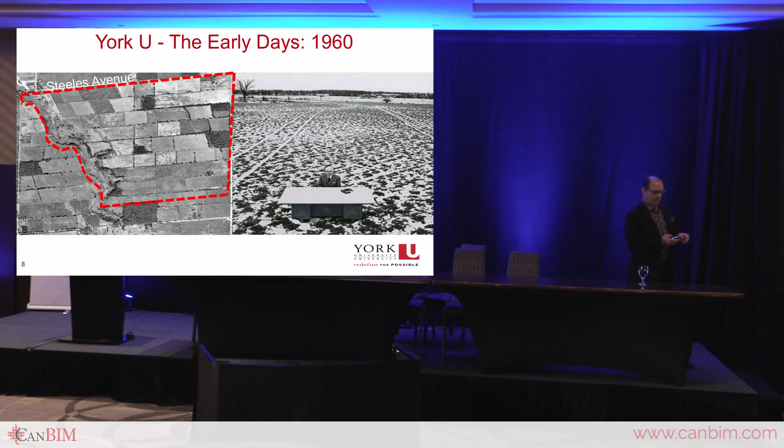It's bounded by basically an agricultural site, and here's the first president, Murray Ross, with a vision of a super university in the late 50s, early 60s. The university began in 1967, when they contracted a consortium of architects that established design excellence with mid-century modern architecture that some of us as architects love, and others very much hate, especially those who have to maintain and operate these buildings.

As I fast forward, we incorporated art into a lot of our public realm of the university. This is how the university started in 1959, when the University of Toronto basically gave us the land for $1 in the middle part of campus. So this is the older part of campus.

This is our current campus, now urbanized after over 50 years, coming on to 60 plus or minus years. To our luck, we now have a subway station right in the middle of campus, designed by Norman Foster's office, and another one by Will Alsop. All of that's also changed the way the university is going to expand because we're now accessible to the entire GTA.

People come from afar and nearby by public transit. I'd say about 80 to 90% of people are now taking public transit. We used to have 2,000 buses a day, both regional and local, on campus every single day. That's changed, and I'm really excited about it, because it's going to allow us to create architecture like this. This is fast forwarding to the year 2000.

Here we are, some wonderful buildings with some of the well-known architects in Canada and engineers working on our faculty. I'll fast forward a little more. This is a project we did in 2010 that won an award for library renewal.

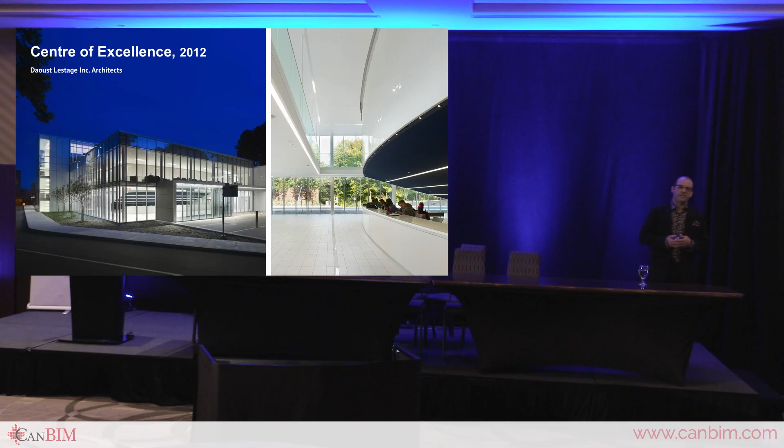As we advanced, we worked with Daoust Lestage from Montreal on a project at our Glendon campus, our French language campus. Cannon Design with Arup and an international consortium built this facility in collaborative BIM through Infrastructure Ontario, which was our first foray into working with Infrastructure Ontario. If you were in Ontario, you'd understand my sensibility about working with Infrastructure Ontario, and I openly say this.

Did we get a good product? Maybe in some ways we did. And the Bergeron—you saw the video—the Bergeron Center for Engineering Excellence: this building, the cloud, as we call it, would not have occurred, would not have been imagined, would not have been implemented if it wasn't for the active implementation of every aspect from conception to the end of construction to operations and maintenance in a BIM environment.

It wouldn't have happened. So a couple of projects we're working on, I'll come back to these as I talk about BIM a little later. An interesting building we're about to embark on—I'll share a little more about that.

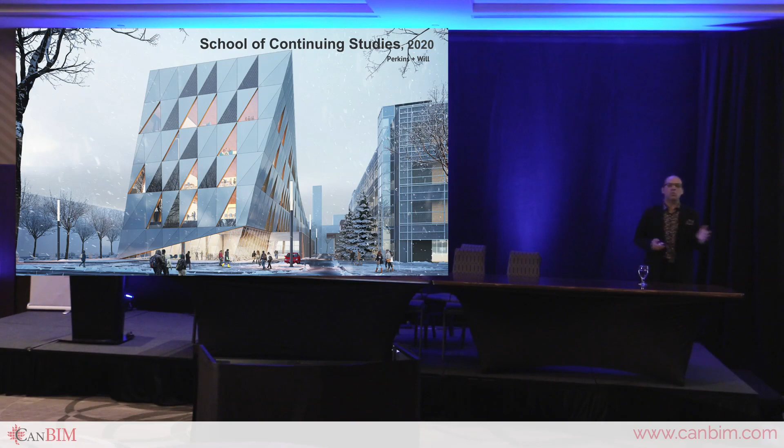What were the changing drivers that made York University consider this, outside of the fact that I had already been introduced to BIM back in 2006, working with a large international A&E firm where, at that time, more than 50% of the projects they did all over the United States and around the world were already done in some kind of collaborative BIM, including architecture, mechanical, electrical, and structural. We took that and put it to another whole dimension when we added landscape architecture, civil, etc.

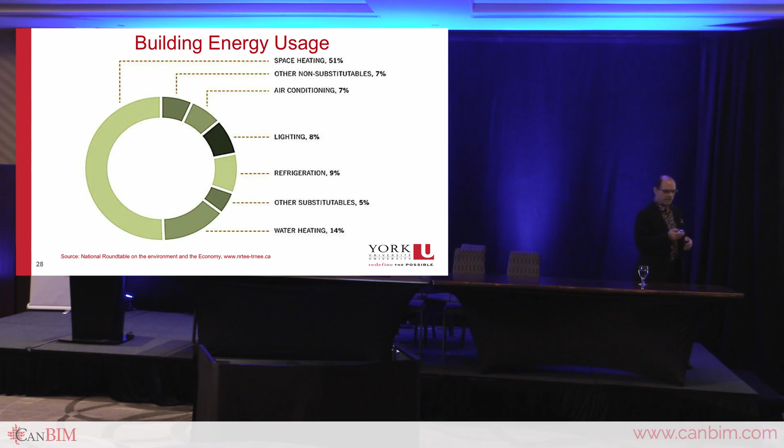So as we think about it as owners and operators, and where all our money goes on a day-to-day, month-to-month, year-by-year basis, it's in this area here. If we can make our buildings much more efficient and reduce the cost of maintaining and operating, that's usually about 50+% to operate a building in just space heating.

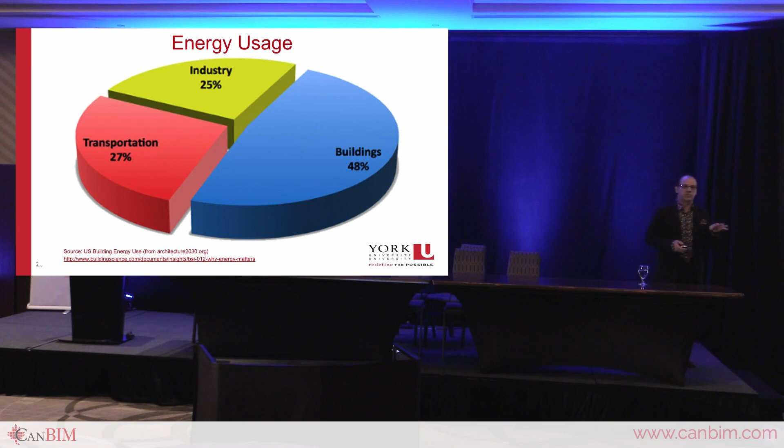If we can make our buildings smarter through planning, design, and construction, it means we can reduce that arc in the circle. Buildings occupy almost 50% of all energy usage in North America. These are statistics from the United States, but it doesn't differ in the Canadian context. So we have to consider how much smarter we can make our processes, integrated and collaborative, to reduce this amount.

This is crazy. Our stock of buildings at our university, in your cities, in your provinces, is extensive. We may be talking about new construction, but I think the power of BIM is really in existing structures, and I'll show you in a minute what I mean.

I'm always arguing with the folks who fund our projects. There's an initial investment of capital cost, and we forget the actual cost of operating that building. Over 50 years, a considerable amount of embodied energy goes to maintaining and operating these buildings. If we can keep the line fairly horizontal to the initial capital investment and bring these down, that's a win-win for everyone.

With the greenhouse gas initiatives that, at least in the province of Ontario, and also nationally, are starting to evolve and manifest into new policies for the whole province, it means we all have to think about how we plan and design these buildings and operate them for the life of their existence.

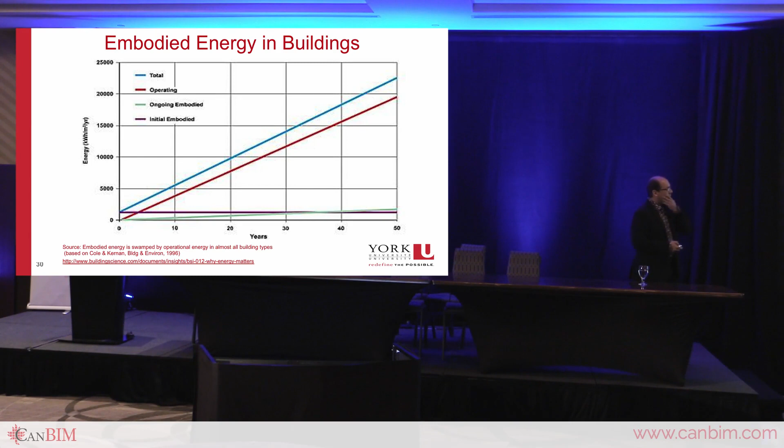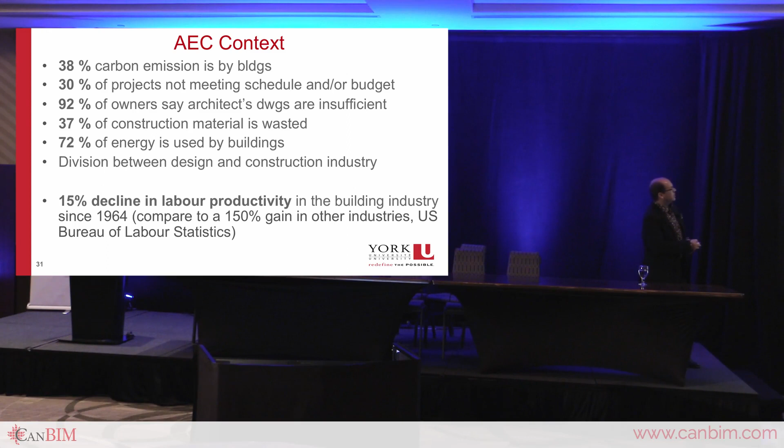Something interesting about this data, and for me as an architect it really pains me, is that 92% of owners say architects' drawings are insufficient. As an architect who received RFPs, responded to them, and then delivered a building only to be told that's my performance—and that's not just the architects, it's probably the engineers, the contractors, everyone put together, because there's a lot of waste. These statistics are important because they let us calibrate how we conceive and operate our buildings once constructed.

When you think about the decline of the AEC industry over the last 50 years or so, while every other industry improved by 150%, AEC has gone down by 15%. What does that say? Gravity is our nemesis—we have to build from the bottom up, can't build from the top down, gravity is always going to be there. So we always have to consider how we integrate and collaborate, and keep the project in mind rather than our independent responsibilities as architect and engineer. That's been part of the problem.

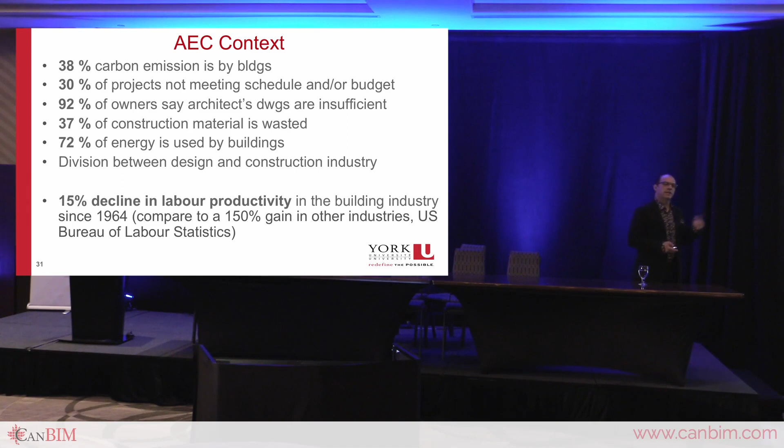If we think of ourselves as a team, I think BIM has created more team environments than ever before. Traditional processes get traditional results, right? And no disrespect to my engineer friends in the room, but this is what happens.

So let me take you to BIM at York—as I look at my watch, I think I have another 80 slides to go. This is our digital York, this is what we have to deal with. As York grows, its facilities and asset management become increasingly complex and important to deal with.

We're starting to utilize a variety of technologies, which we've been doing for a number of years now, as you can see from BIM, CAFM, and GIS, Maximo which is our work order system, and Archibus for space management. Maximo and Archibus work quite well together—they have a plugin for Revit which allows our BIM models to tie into our work order systems. We're working through that with our finance department and procurement to integrate them better.

We're working through the process of converting files coming out of the models through COBie to then integrate into our Maximo. We've been going through the exercise of trying to determine where the information should reside. We're also using GIS and ArcGIS to map all our information, and we're trying to merge both BIM and GIS as we move forward.

So let me take it a little further. This is a chronology of how we've adopted BIM at our university. In 2010, we started our first project for an existing complex.

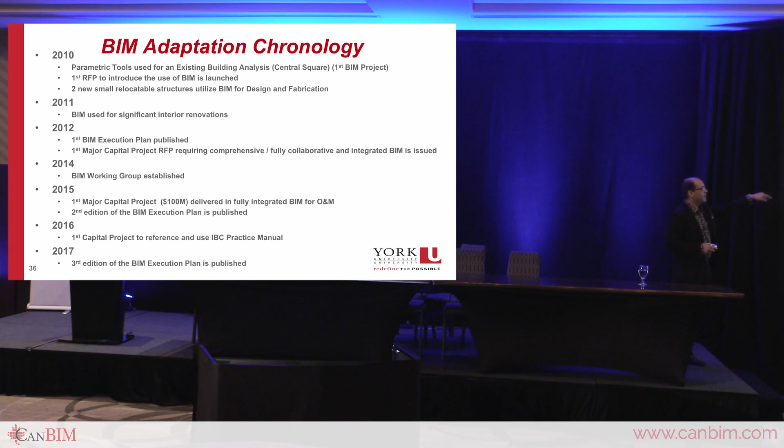And so as we move forward, our first capital project that was then rolled out using our first BIM execution plan was that video that you saw. And that was the general contractor partner and the landscape architect who worked in BIM for our particular building. I'll speak about that in a second as well.

We've now moved through these various phases. And right now we have about $450 million of capital work. We constantly have about $500 million. And I would say right now about 50% of that, because it's building related or interiors, it uses or implements some form of BIM throughout the process.

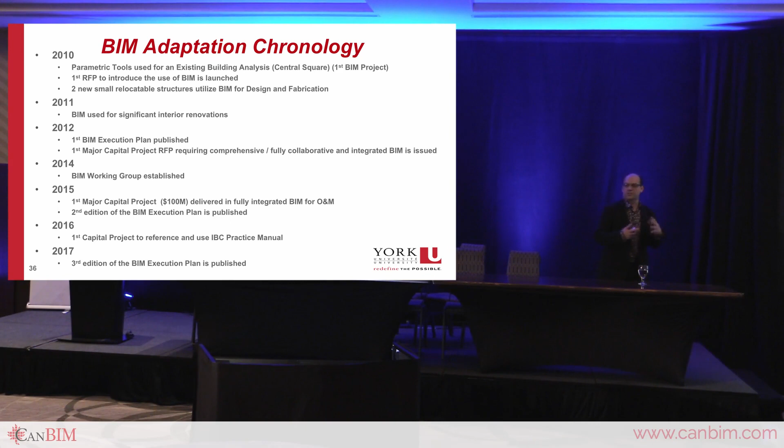And we're in actually our third version, maybe 3.0 of our BIM execution plan. And we have 2 BIM execution plans. One for CCDC2, stipulated sum, and one for CM, because they're a little different. And we're in the process of now conceiving a project which we hope to be integrated project delivery, which will have another set of BIM execution plan for that delivery methodology as well.

So our commitment to BIM is, as you can see by the awards, and I'm happy to say, we won the Design Award in 2016. We won the Owners Award, the Best in BIM that year. So we're pretty excited, and we're committed. And as you can see, the following year, we won it again as the Owners Award. So we're going to see if we can do a three-peat this coming year.

We have a couple of projects that are also fully integrated BIM. We're hoping that's the case. But I'm also excited if others win this award, because I don't think it's fair that we're the only ones achieving those milestones. I think the accomplishment would be when everyone else receives awards. And then it speaks to actually where we actually were and where we actually are going. So our trajectory then hopefully will be a different one.

This is when we won our award, and if some of you who are not familiar with IBC, the Institute for BIM Canada, the manual itself has our building on the cover and the tabs. And we're pretty proud that IBC felt that our project should be displayed in this fashion. And we contributed to some of the documentation that they used, just like we had learned from many others, like Penn State, and there's other universities in the United States. Princeton has another one. There's another one in California. We've learned from others, and we're happy to share and contribute as well. The more we can share, the more we'll learn from you, the more I think we're all going to go.

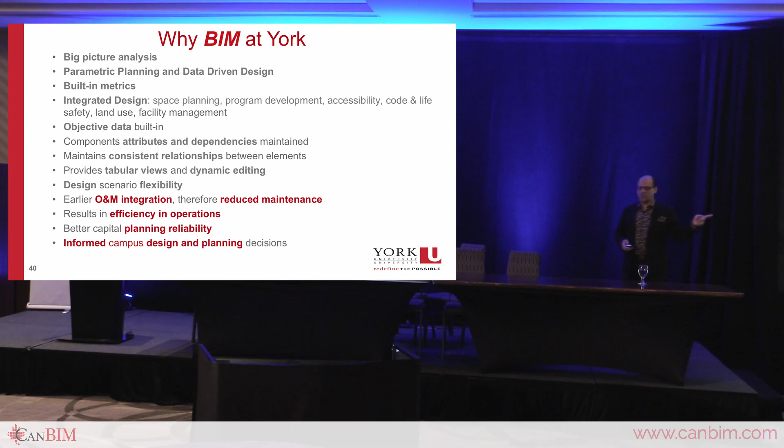So when I started to work in a BIM environment, we started to adjust where we spend our money. We were moving our fees from design development or construction documents to the front phase, moving the 10, 12% to 18% or even 20% for schematic design and design development. Thereby the objective is to reduce the amount of effort during your construction documentation phase. Doesn't that make sense? Where you can make the most impact?

You don't want to do it here because you know what that contract is going to say? Happy to make the change. Cha-ching, cha-ching, cha-ching, right? And that's not what we want.

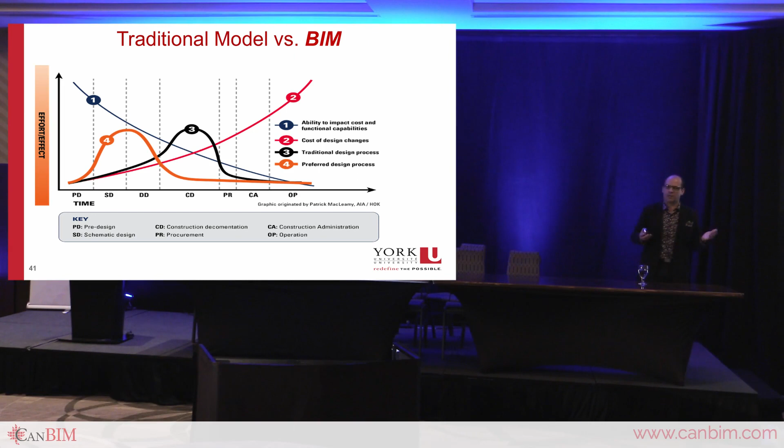So this is why when I see proposals now, I always have a conversation with the architects and engineers. Are you sure you understand we're doing it in a fully integrated collaborative BIM? You cannot be charging the fees in the manner that you're doing it, you're going to be short during this first phase. So they're happy to change it, and that's because it's coming from us.

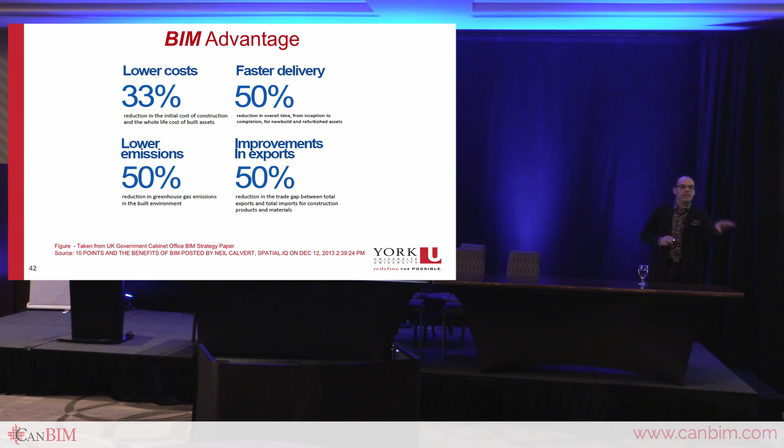What it's done for us as a university, and maybe it could work for other owners, is it's brought our operations and maintenance folks to the table a lot sooner. We involve them in the conversation. They don't shy away about BIM for operations and maintenance; they actually tell us this is what we need inputted into your models so they can extract the information for their particular responsibility. So getting them involved early becomes very important.

So I see I'm running out of time. 50 more slides to go.

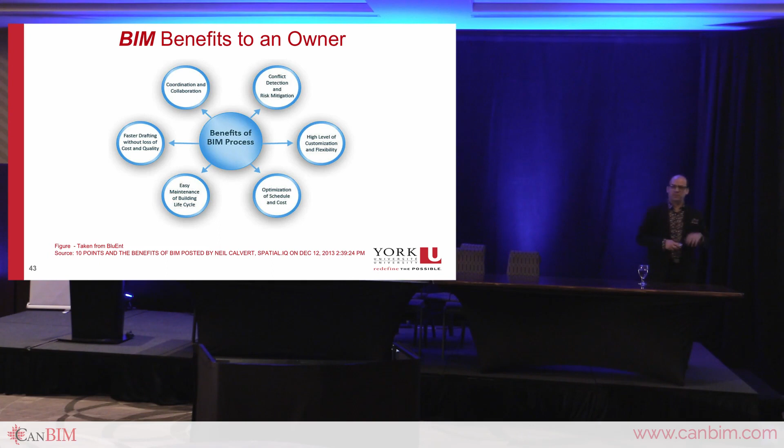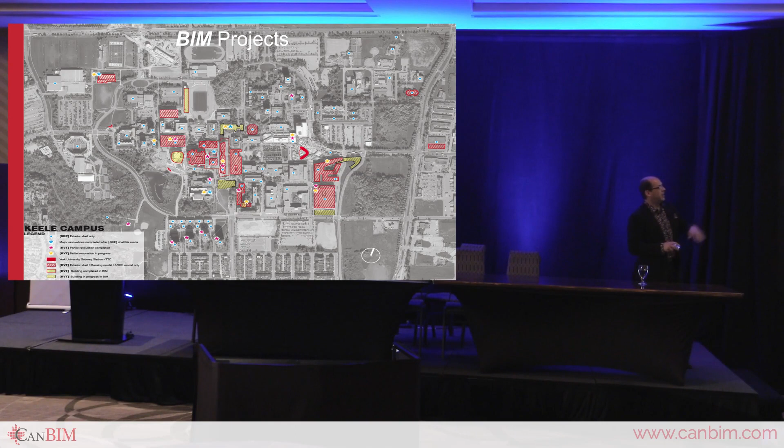So that's the Bergeron building, the cloud as we call it, our new building that we're building, that we're going to do there. All these other buildings are all in fully integrated BIM, and you see a scattering of all sorts of interior renovations all over the campus that will utilize BIM in some way. So let me take you to a quick study, which I already spoke about.

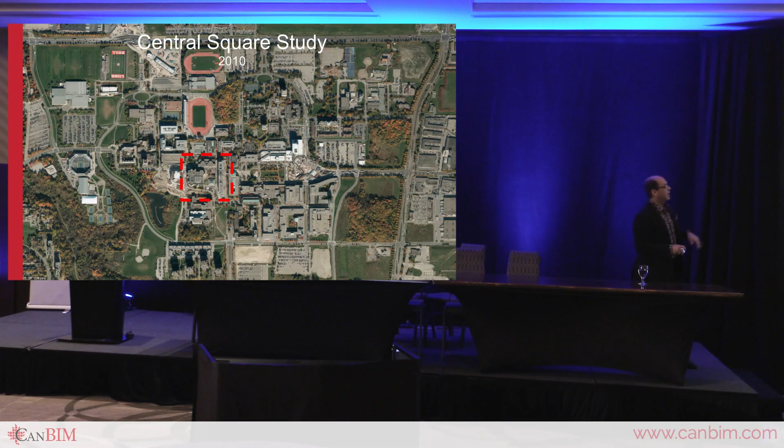This is the existing building, how we started, with five buildings. We basically asked the consultant team to look at all this, from space planning, building design, sustainability, stormwater management, code life safety, et cetera.

And so they were selected. It happened to be a team not from Canada, I have to admit, and it's unfortunate. And they produced a model of the structures for ourselves. We actually looked at a number of scenarios and explored those from different vantage points.

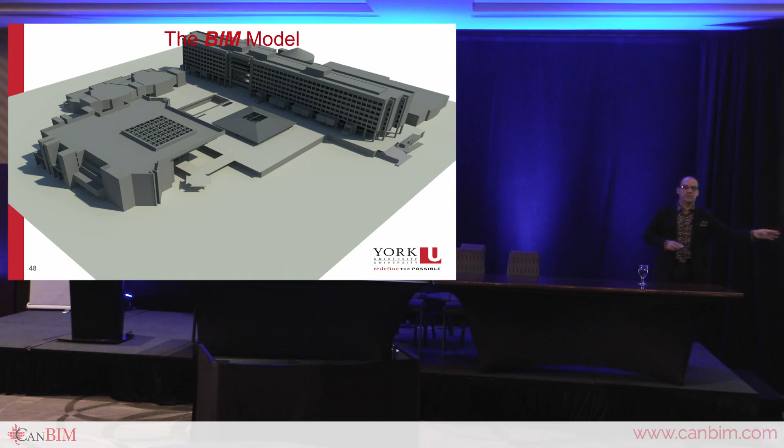For example, every option had an opportunity to look at energy and what that means in terms of return on investment. Using the model, we were able to do so many other analyses that we could inform the vice president of the university: look, we need $6 million for this, we need $5 million for that, we need $20 million for this, and so on.

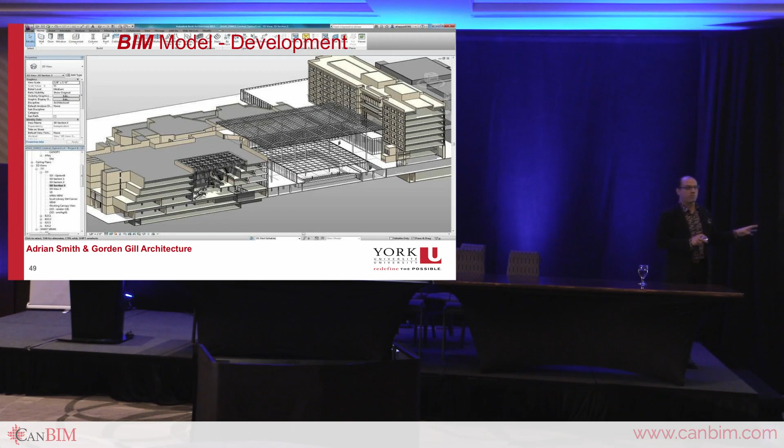When you provided these kind of metrics and the payback, they understood that if we wanted to improve the energy of those particular concrete buildings from the 1960s, we had to change the windows to improve energy performance, or maybe deal with solar shading because they faced west, and most of the glazing was on the west side—something that in the 1950s and 60s people weren't as aware of.

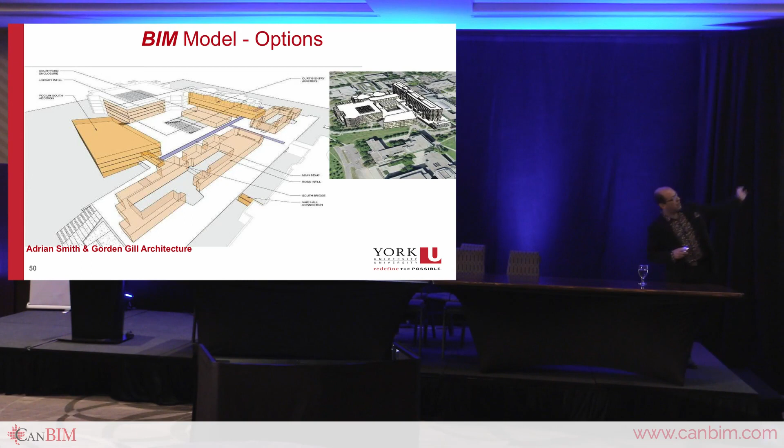So we looked at all sorts of measures for how we can improve our energy efficiency utilizing that base model. One team did all this. As a result, we ended up with all sorts of information that we were able to use to make decisions about our next phase.

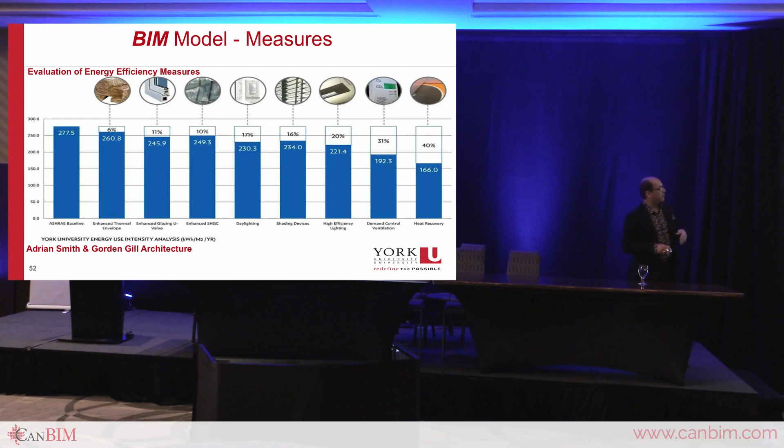And so our next phase was this. We took that study—it was a $300,000 study, by the way—and this was the first foray, first phase, of landscape architecture using BIM.

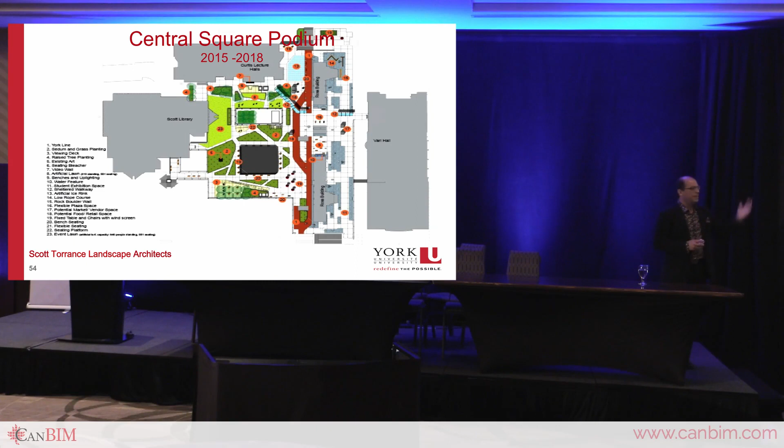We've basically renovated this entire, sort of desolate area, and now we've greened it. We're getting $100,000 back from the city of Toronto for basically greening that podium that was concrete for about 40 years, and as a result we're going to put that back into the project.

So can you use BIM for something small, something large? It's scaleless in my view, it's scaleless. So let me keep fast forwarding here.

The architect never once argued about it, nor did the mechanical and electrical engineers, and I think we ended up with a great project. Like I said earlier, I'm going to skip through that.

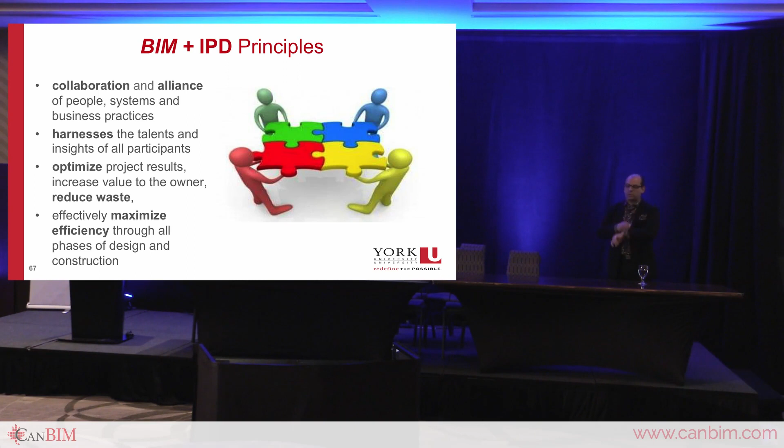So let me quickly walk you through some other images here. This is our project that won the award the other day, and let me show you how this was the catalyst for all our projects going forward.

So this is for 2012. We established the BIM execution plan. This was delivered, and now we have multiple projects following kind of the same format. However, we've gone back and learned from this particular project, and now we're tweaking our processes and deliverables accordingly—so the level of development versus the level of information. They don't always have to be at 500. One could be LOD 100 with LOI maybe 800, if such a thing exists.

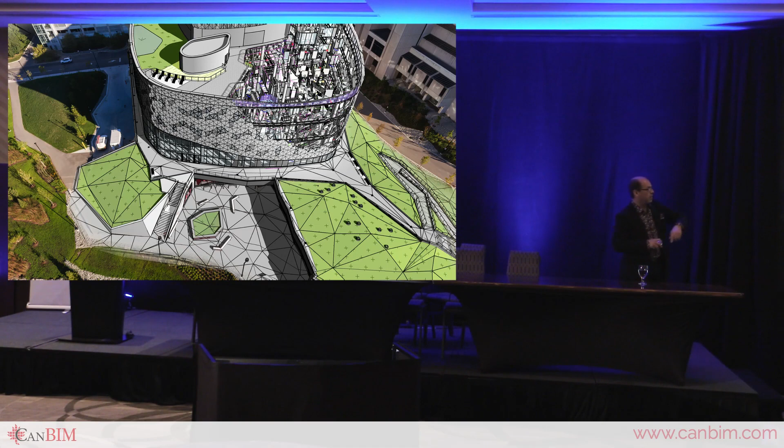So here's the landscape architectural work in a BIM environment—just wanted to illustrate that we did do that. Site logistics from the general contractor, very, very important. All the software that we're using, and it's shared—sorry about that.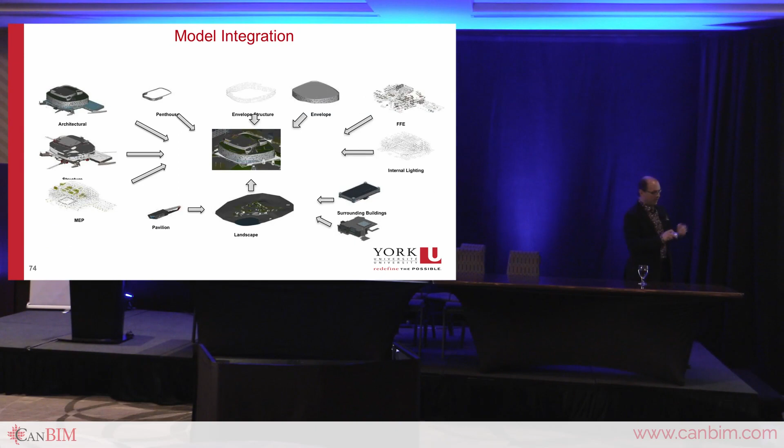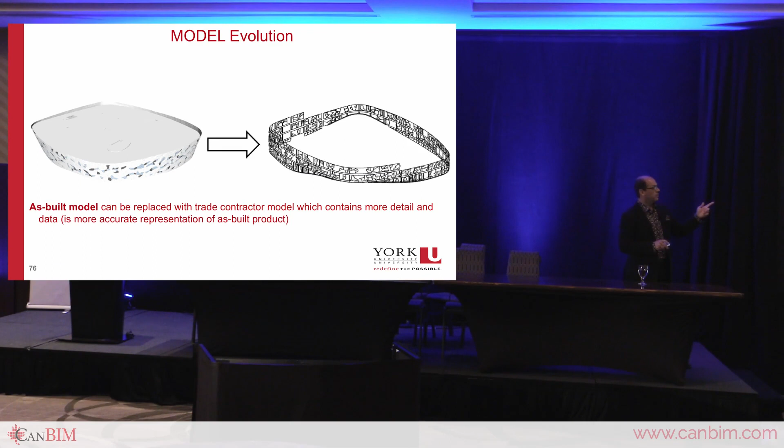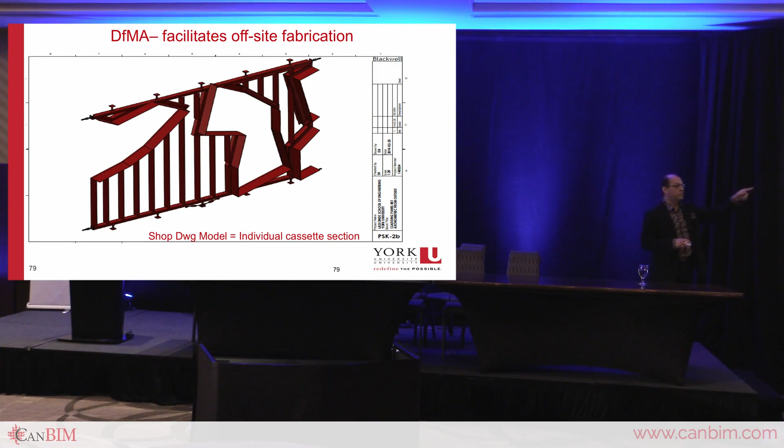Our models, in this particular case, had 85 models integrated—everything from clash detection and interferences were explored, and that's all the requirements we now expect on all our projects. For fabrication, from this it goes to this, to eventually the shop drawings in 3D, to fabrication, to the actual installation on the facades, and we're working on a new project exactly in this same vein. By the way, those cassettes, as we call them, had a 5mm tolerance all around, and those sections are probably about 7 or 8 meters long by about 4 meters tall.

That's very tight. Some of the infrastructure came from Calgary, by the way, to Toronto. I think that was a no-no, not that it came from Calgary, just the footprint - that's a long way to pay for energy.

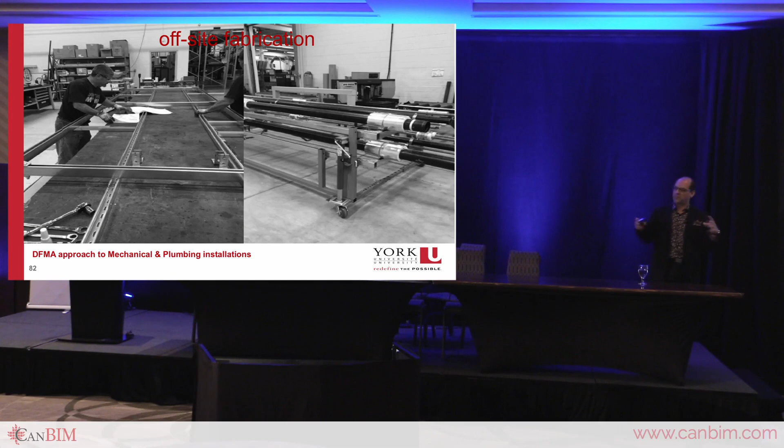All our plumbing and HVAC is done off-site and brought in and basically connected like a puzzle. That was the whole purpose of that, and we're doing more of that. On-site installation helps the guys put together all the glazing.

And then more importantly, this - we're actually identifying the assets. We already have a list of approximately 120 elements, vetted by a number of people that deal with our operations, energy, maintenance, and so on. Now we've calibrated that to those 120 elements, and that's being incorporated into our BIM execution plans, issued to the general contractor with the RFP in advance so they know what they're getting themselves into, not after the fact. So we have our coding, that university coding for our facilities and so on.

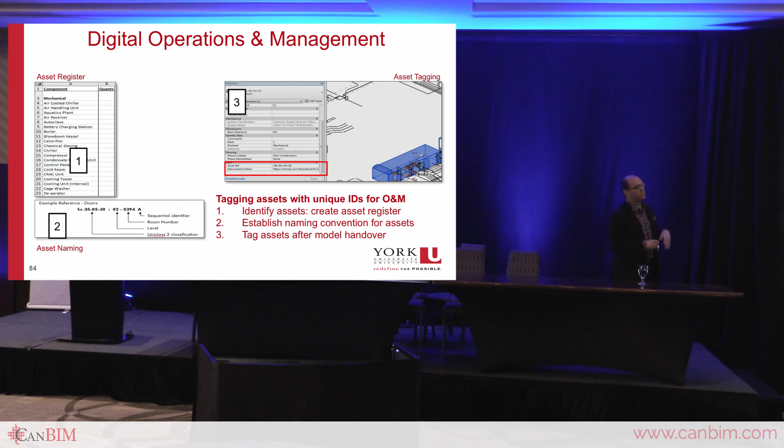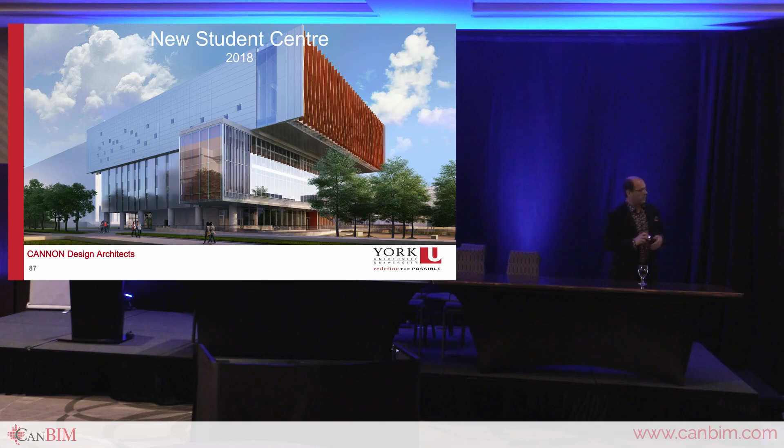Our new student center that just opened about 3 weeks ago was done entirely in collaborative BIM as well, for the purpose of operations and maintenance. The students are going to get a little crash course on how to take data out of a Navisworks model or maybe one of these other softwares that are easier, so they can manage and operate their building because they're the operators and maintainers of it.

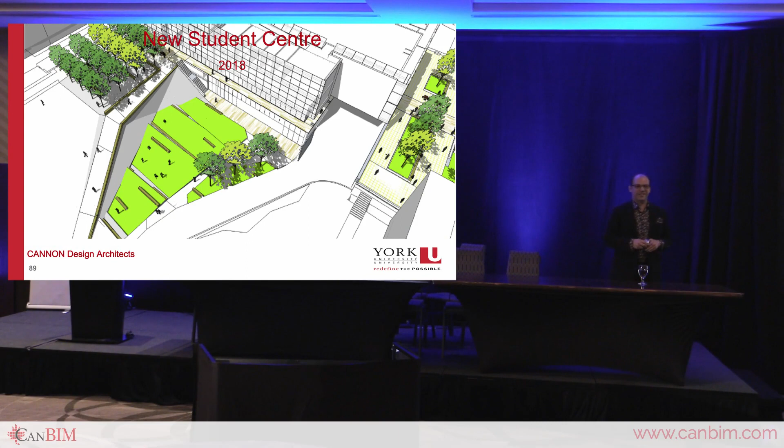So let me finish off with a few slides about the benefit of BIM for your business. I've probably already spoken about some of these: improved building design, there's no doubt; information streamlining and integrated workflows, very important; building performance and sustainability, and that's really our focus - that's always been our driver.

When we brought the operations and maintenance folks to the table to discuss this, this is what we spoke to them about, so they understand our purpose - it wasn't to make those beautiful BIM models or 3D models, as Raphael put it earlier. And yes, our users love it. Decision making today is so much quicker when you show your users the information in a 3D environment about anything in particular, small or large - it happens a lot quicker. You have to remember, a scientist who does biology research - how are they going to know, if you show them something in 2 dimensions, what it means, what his lab is going to look like and perform? So you have to use the tools that are available.

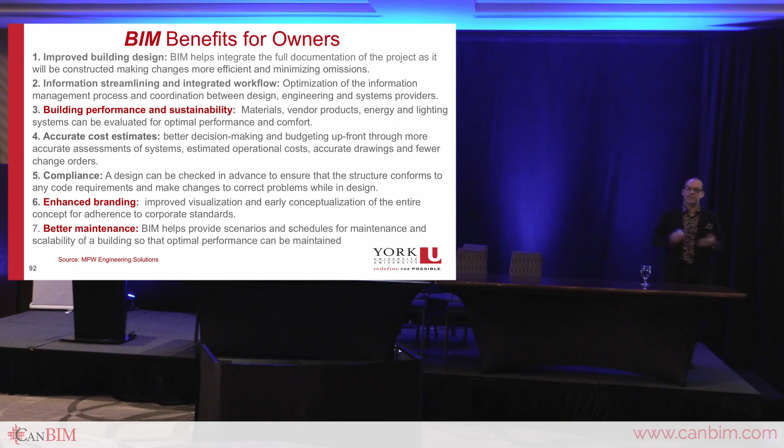I always use the three principles of architecture presented to the world about 100 years BC by Vitruvius, who talked about commodity, firmness, and delight. I think you need a balance of that. Commodity, it has to serve a function. Firmness, it has to last. And it has to be beautiful. For a university, the balance of all three is very important for us.

So let me keep going forward. The return on investment: a 20% reduction in building costs, reduction in conflicts and rework between 47 and 65%, better performance altogether in terms of infrastructure. This is statistics from the USA.

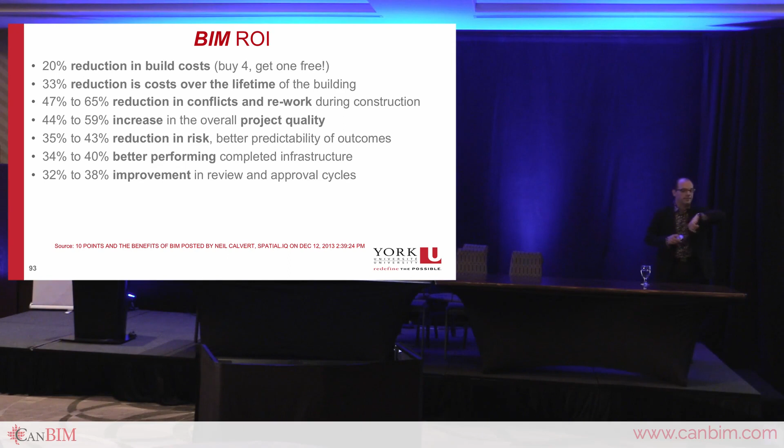Getting close to the end. Facilities management, obviously complete and accurate data is very important for us. Real-time performance data, and if we can find that data quickly and make it simple for those who consume that information, it becomes very important. So reliability of as-built drawings.

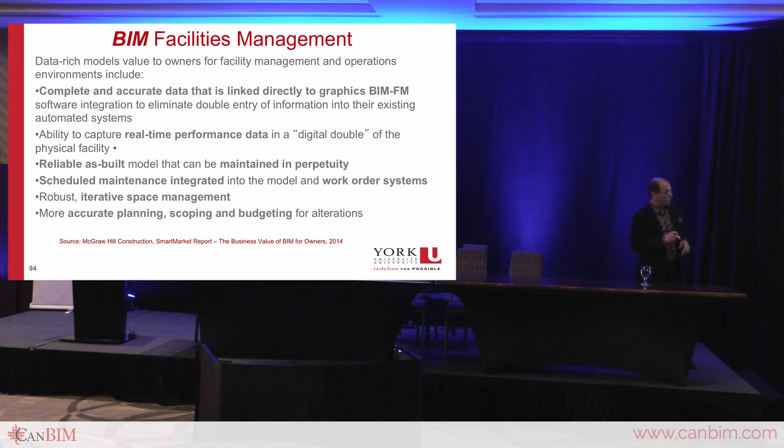So our future vision, I'm getting close to the end. I've got 106 slides, so I'm almost done. Progressive photographic records: we're actually embedding now progressive photographic records from the day the hole is dug for the foundations. All that's being tied to the BIM model, so you can go back and drill down to exactly what was put inside those walls and those floors.

More importantly, I want to draw your attention to the commissioning training videos being attached to the BIM model, so that if a new person comes to operations and maintenance and doesn't have the institutional history of that building or campus, they can go through those training videos and walk through the building with actual training in a virtual environment.

Isn't that clever? All our three major capital projects are under construction right now, and they're all going to be delivered that way.

We also require the final as-built record model be issued back to the consultants. They review it for compliance as an as-built model, and then it's given back to the entity that links the models with the video and photographic records.

We're also looking at tying in BIM, and we started with point cloud scanning for a number of our projects, especially for major renovations. We're undertaking one like that right now. This becomes very important because that scan is then our point of truth at that moment—not the drawings that are 40 years old in my office, for someone doing a takeoff on that space.

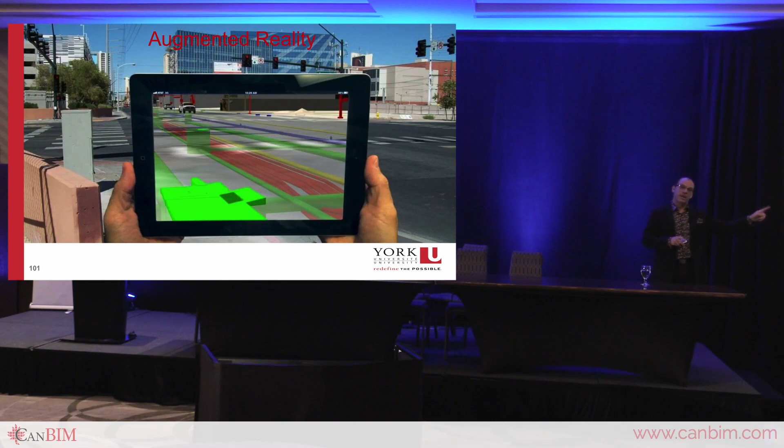Our dream is to have our energy manager and operations folks go out and do exactly this on site with their smart tablets. We've started to test this already, and that's where we're headed.

So let me finish with two slides. Some takeaways: we have a BIM working group, established in 2014, made up of planning, design and construction, space management, operations, maintenance, engineering services, information technology, finance, procurement, and legal. Get them all at the table early, talking, to learn about what BIM is for each of them and how it's helping the university at large, or in your case, your own organization.

We meet once a month; if you can, at least quarterly is what I'd recommend. Get them involved very early, and get subject matter experts involved in all sorts of projects, because without their buy-in, you're not going to get results. Remember, data is power, so the more you can demonstrate to them the value of the information they have, the more important it becomes in how they run their operations.

So the final slide, or second-to-last slide: this does not apply only to new construction—it applies to existing buildings too.

You have to remember that: start small. Use some pilot projects, like that Robotics Pavilion or an existing facility. That's how we started, so I always encourage other owners to start somewhere, somehow.

Talk about the infrastructure of technology. We've been working with our IT division of the university to help us upgrade all our computer systems, our servers, and so on, because all our computers are in our office. We're about a staff of 30 in the one group. We had to upgrade most of our computers, et cetera. It's the cost of doing business, and I think if you really are committed, you have to make that investment.

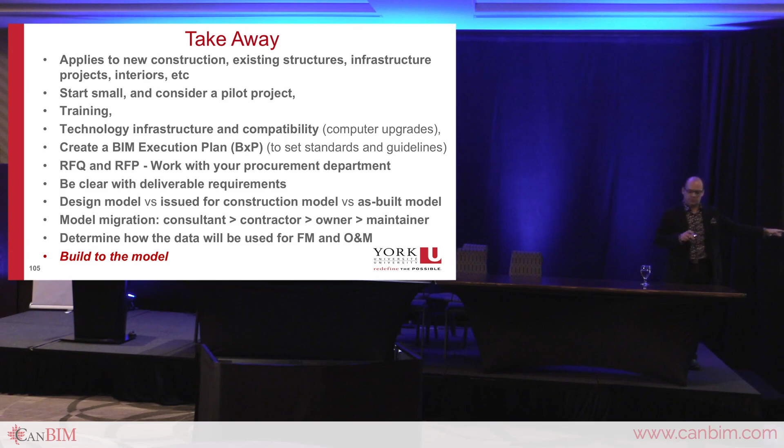At every stage of schematic design development, we review the model, basically for quality control. Not that we don't trust them, but as my assistant vice president says, every time we hire a consultant team, that BIM model to us is worth $5, $7, $10 million — that's $10 million of intellectual property and information from that entire consultant team. So he understands the importance of that and the value going forward. Establishing parameters for how you actually receive those models becomes very, very important. So remember that: build to the model.